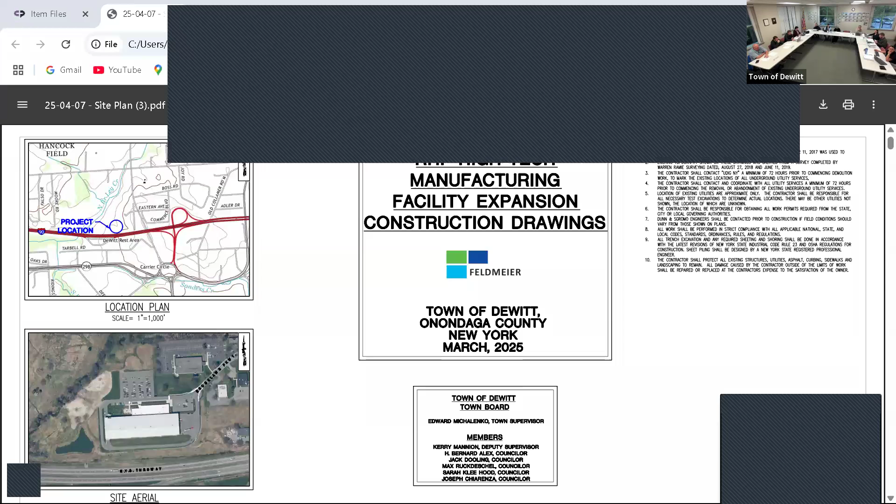First up on our list, amended RHF high tech, for finalizing the whole process on parking. Good evening, Greg Strummer representing Feldmeier. As you may have heard, the ZBA did approve our variance, so now it is back in front of you for questions, comments, and thoughts.

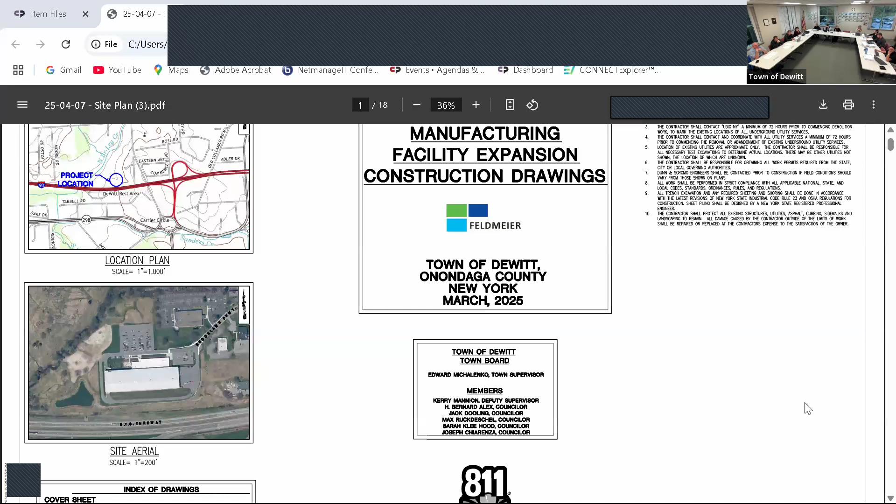And plans. As previously stated, really the only thing that's changed on the site is the reduction in the parking. Otherwise, stormwater is the same, parking and traffic circulation is the same. Nothing has changed on the south side of the building, and nothing has changed here. The only change was we took out the parking that was banked there and the parking that was banked up there. That parking had its own stormwater system, so that kind of just went away with the parking in this plan. And this one here had the capacity over here for this stormwater through here and there.

The RPZ is in now, so that's out of the way finally. What took so long? I have no idea.

Any other questions, we thought this through with ZBA? Other questions? Motion to approve the site plan dated March 25th, 2025 with the following findings and conditions.

A revised site plan was approved for this site on June 13th, 2024. The approval allowed for construction of a 71,250 square foot addition and a 10,699 square foot addition to the site. The construction for those additions are underway. The approval of June 13th, 2024 determined a required total parking count of 420 spaces.

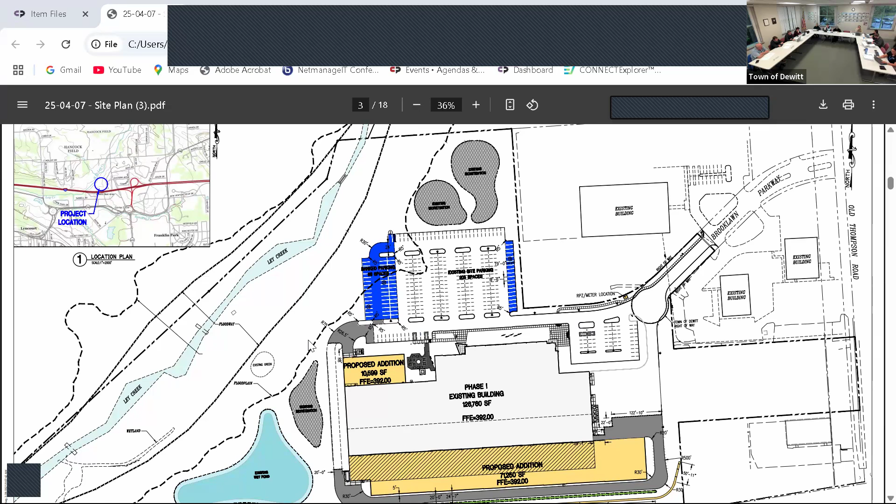The plan showed 111 spaces to be built west of the existing 205 space parking lot as part of the approval. The balance of 104 parking spaces was to be placed in reserve between the existing building and Old Thompson Road. The applicant came before this board for an amended site plan which intended to seek relief from the number of parking spaces required in total on the site and to be placed in reserve.

This board has heard from the applicant relative to their current and proposed use for the site. This board sent a positive recommendation to the zoning board of appeals for a variance to permanently reduce the number of parking spaces required on the site. That resolution and the findings therein are incorporated by reference herein. The zoning board of appeals granted a variance that reduces total required parking spaces to 273 spaces, where the code requires 420.

We want to add the date of that approval? We can, just add the date, so we'll add the date of that approval. The 19th.

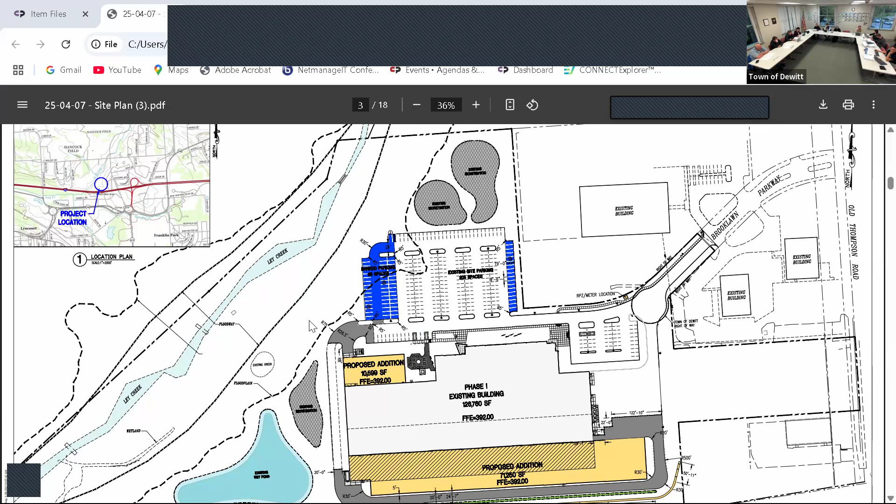Considering the prior findings of this board relative to the justified parking needs of the applicant, this approval hereby further approves that 25% of the required 273 parking spaces be placed in reserve and do not need to be built at this time. This is made with the further finding that said reserve parking is not currently required to be built. The plan shows that the reserve can reasonably be built should it be required in the future. Accordingly, the approval of reserve is made with the condition that the Department of Planning and Zoning or the Planning Board may require the parking be built when the same is deemed necessary or desirable for the current or future use of the site. This approval is made with the further condition that, except as specifically modified herein, Planning Board approval of June 13th, 2024 is in full force and effect.

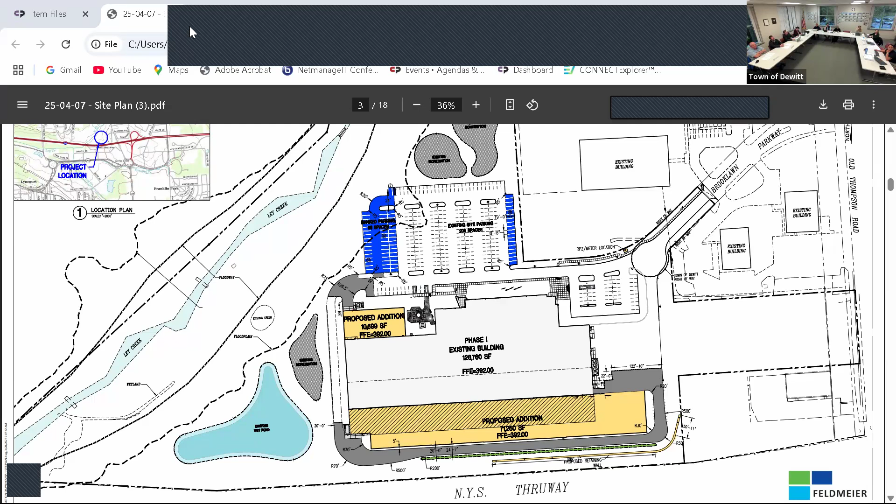When are you going to be done? I think they're thinking end of June, early July, they're going to get their temporary CO at that point. The factory floor was still running at the same time as construction though? Yes, it actually was planned from day one when we did it, so that they could keep operations. The wall in between the two of them had certain cutouts planned so that they could leave that wall, and they wanted to leave it for sound and that sort of thing. Yeah, they were able to continue construction throughout the whole process.

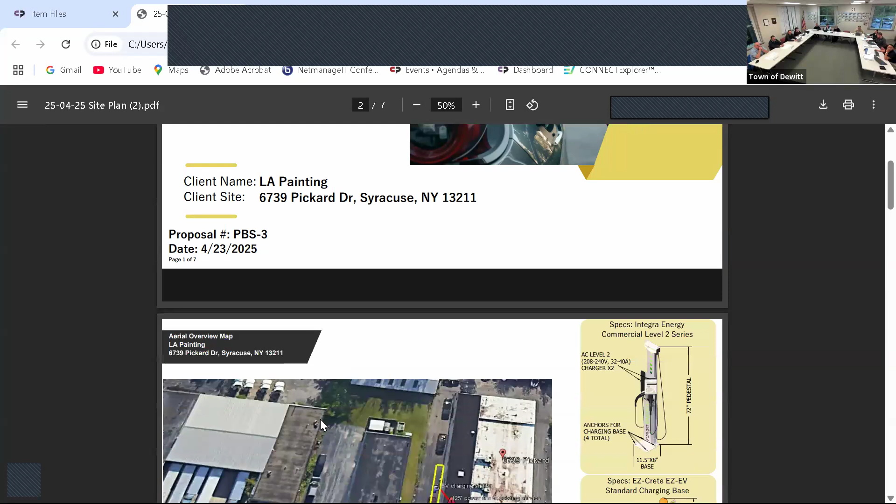Let's see, who's controlling the screen right now? This is your presentation, so just ask her to advance as you see fit. We're going to have 1 dual port in the front of the building on the left-hand side, and then 1 in the middle of 2 parking spots on the side of the building. We're going to tie existing service to an inside panel, a 400 amp 3-phase panel.

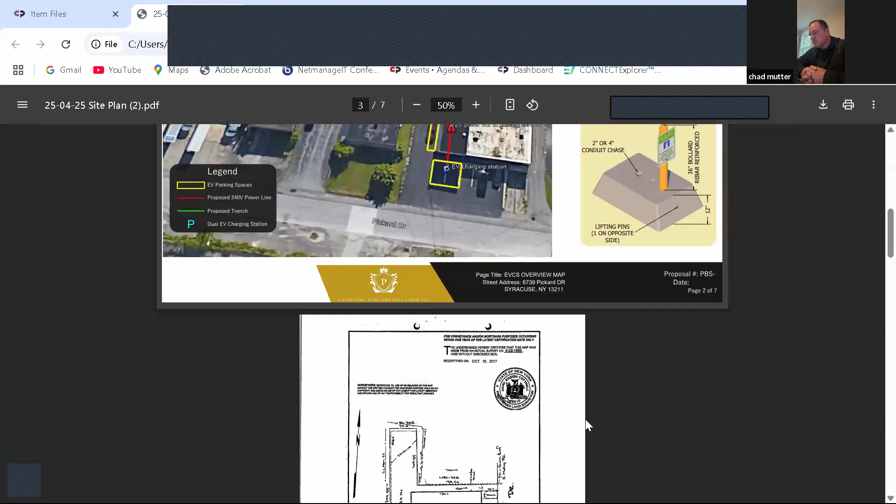You can slide up. These are just the engineering prints that you guys requested. It just shows the front of the building, the charger sitting there next to the 1 car. They'll be able to charge both cars if the empty space is there, so 2 cars charging at once if available. The other charger will be able to charge 2 cars on the side of the building, so it'll be 2 plugs.

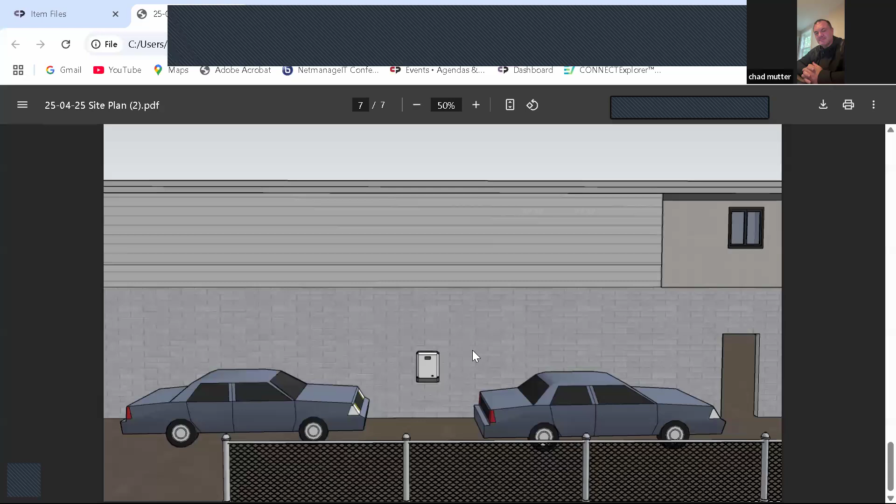Yep. I don't think those cars are electric. Well, you know, they're electric. Okay.

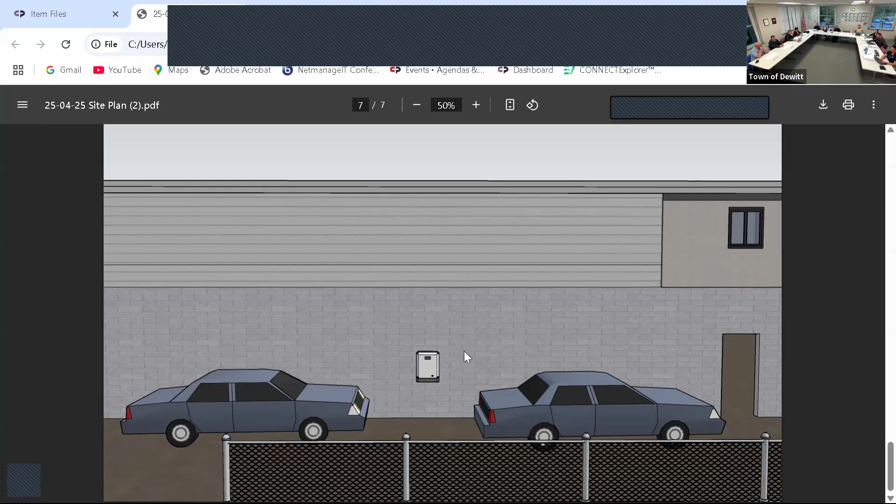Let's open up questions. I think we'll want to talk about site circulation, where some of these are located, protection, etc. Can we go back to the site plan?

The picture doesn't show the 2 bollards that will be sitting in front of the charger as well for protection, for both chargers. Yeah, that was going to be one comment. So the one in front would serve 2 parking stalls that are there.

Effectively, you need 4. The issue we have is that what you're calling parking spaces parallel along the side of the building are not actually parking stalls, so you cannot put something there and encourage people to park there. Parallel parking is not allowed within the town.

So we've got to look at other options for location - right now is it a one-way loop, where you drive around the left side? No, you can get 2 cars down, so it's two-way there. If you don't like how I have it situated in the drawing, I can also put them in the back of the lot - there's about 15 parking spots back there.

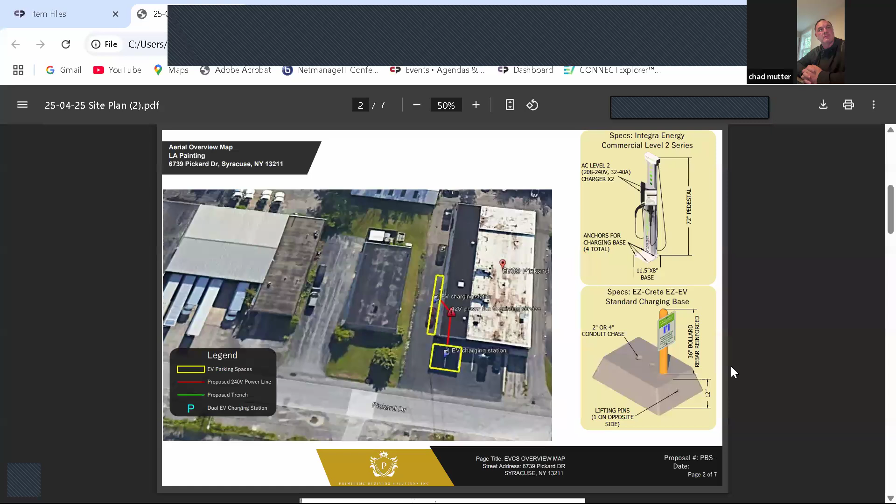But he can't - so you're telling me he can't park his commercial vans there to charge? Technically, no. Okay, I'll have to let him know that, because that's where he wanted to park his vans. Yeah, parallel parking is not allowed - it would not count towards parking counts or be approved on a site plan.

Okay, I can move those 2 spots to the back of the building then. That's an easy fix for me - I'll just redraw the map to show the 2 additional spots out back.

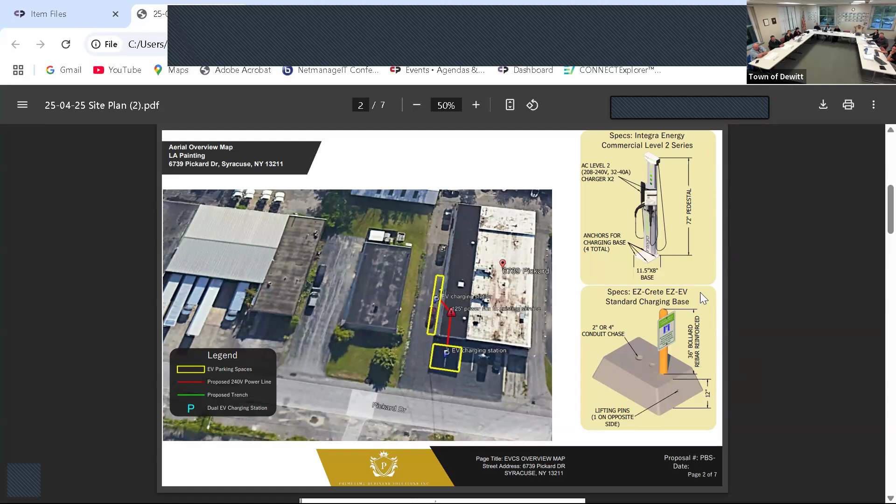And then the charger in front is actually set behind a concrete walk, right? Yep, it's a precast concrete pad we build in-house with a bollard inside the concrete with rebar, and it's held to the front so somebody can walk behind. The concern is cords laying on the ground and someone tripping - that's held forward so you can walk behind it, correct? Yep, there are retractable cords on the charging station, so they retract back into the machine after use instead of being coiled.

So the way this is represented, is there a walkway like a raised curb, or is that flush? The aerial photographs just make it look like it's paved all the way to the building. Which one is correct?

That whole gray line, it's paved all the way around. So what is that gray line represent?

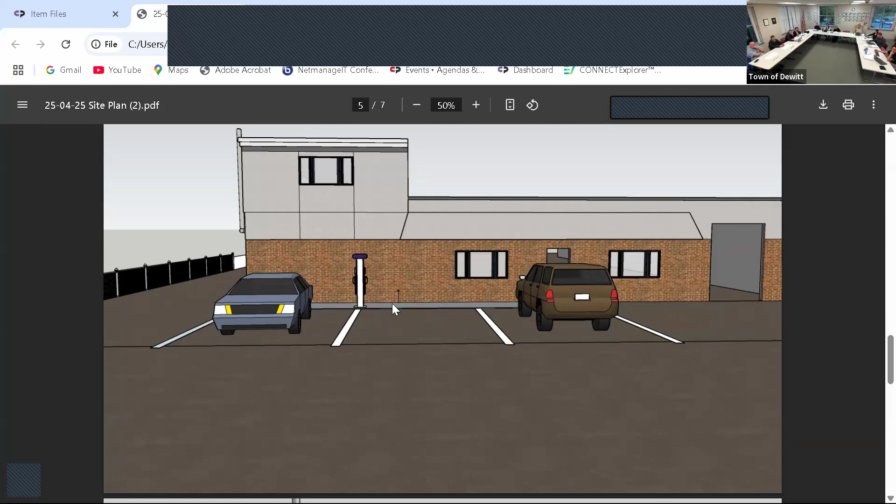That's just the base of the building. It's nothing. I'm going to be putting a concrete pad in the middle of that parking spot, right on the center line, dead center. There's going to still be a walkway behind that charging station.

Does that minimize the size of the parking space? No, I'm just going to put it dead center on the center line of that parking spot. It's not going to minimize that parking space, nor is it going to be in the way of the walkway? There is a little walkway there.

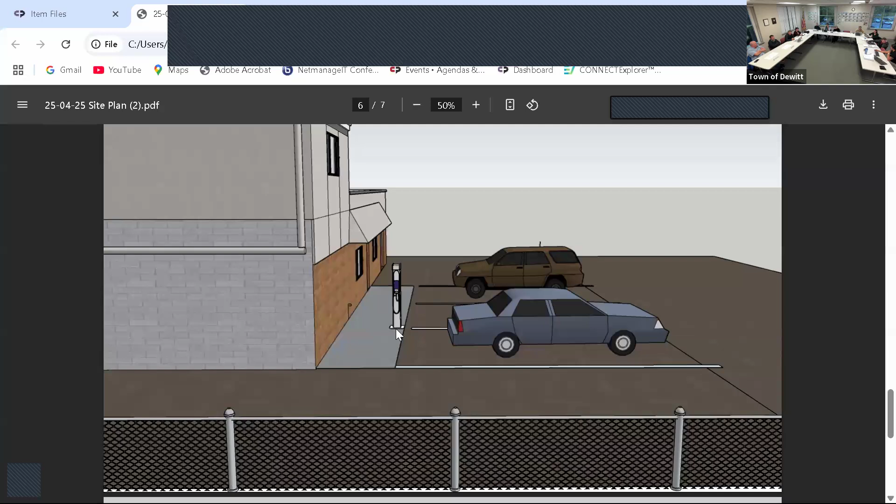As it currently exists, there is a parking stall plus what we'll call the concrete sidewalk, that gray you're seeing there right now. You're not impacting the parking stall dimensions as they exist right now? No, I'm not.

I think we actually need to see a drawing with the pad drawn on it and the correct sidewalk, because looking at the images online, it doesn't appear to have a sidewalk like you're showing there. If that is there, we just need the correct dimensions of everything in your pad.

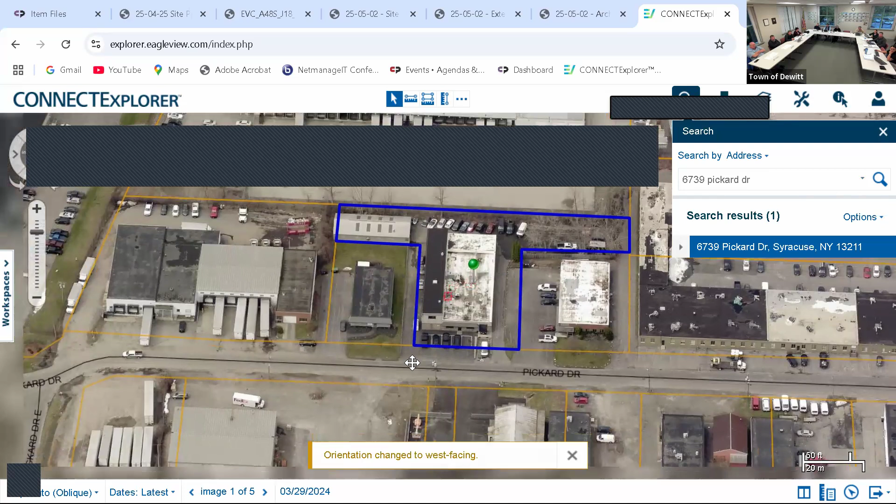If I heard him correctly, he's putting it on the center line of the parking spot, which takes up a strip and minimizes the width of the parking spot. There is a strip behind the parking spaces, I think, so he's putting it on the center line but behind the white line, so it doesn't impact the parking dimensions.

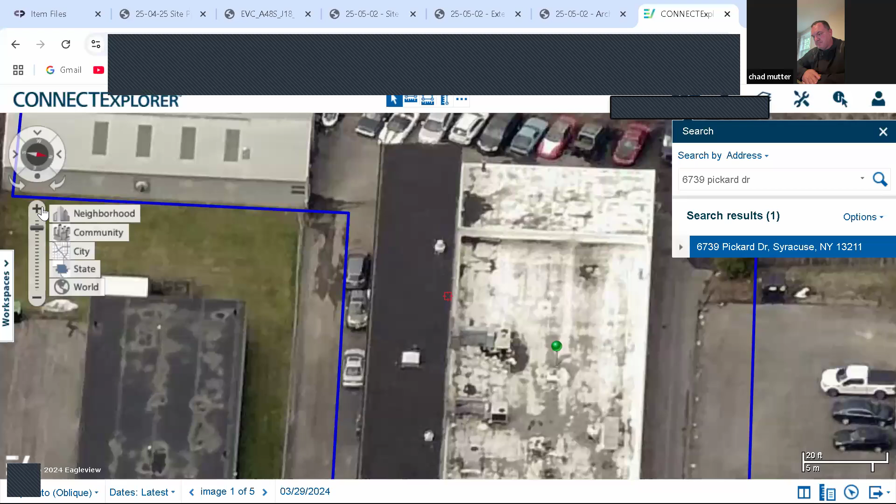Correct. So what I then heard - it will be on the walkway, so you have to walk up over this pad? No, walk behind. I think it's misrepresented in the drawing. It looks like a concrete pad, but it is paved directly up to the building.

They will be installing a small flush concrete pad to put the charger on in this location, with 2 bollards to protect it. And it will be flush with the pavement - it won't be sticking out. There will be no lip on the concrete pad. It will sit flush down in the hole with the pavement.

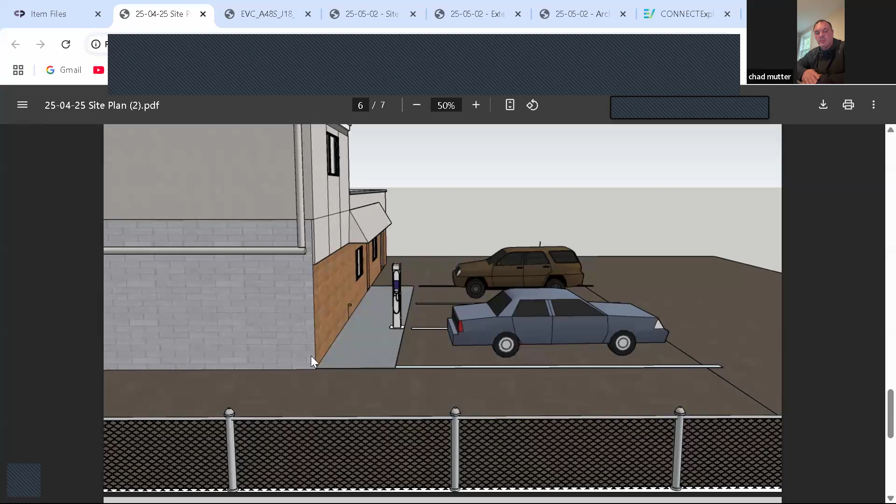From above - so right there, the one you just passed, can you show that? Can we get it drawn on this, or is that like that blow up right there? I don't think it's... I think that's just a survey. No, it is shown.

As it's shown there, it's not where you would actually put it - it would slide up to be in line with that parking stripe. Correct, yep. Okay, so then that could change.

Just show us if it doesn't have a height to it, so you're saying it's flush? It will be flush. So if you show that in your document, and also show the width of it, just so we can see in case it's not flush. Okay, there should be the dimensions of the pad, I believe.

If you go up a little bit, it might show what the pad looks like and the dimensions of it. The pad doesn't look flush in that image. That's the way it looks going into the hole. I know, but that's why your drawing should show us how it will end up.

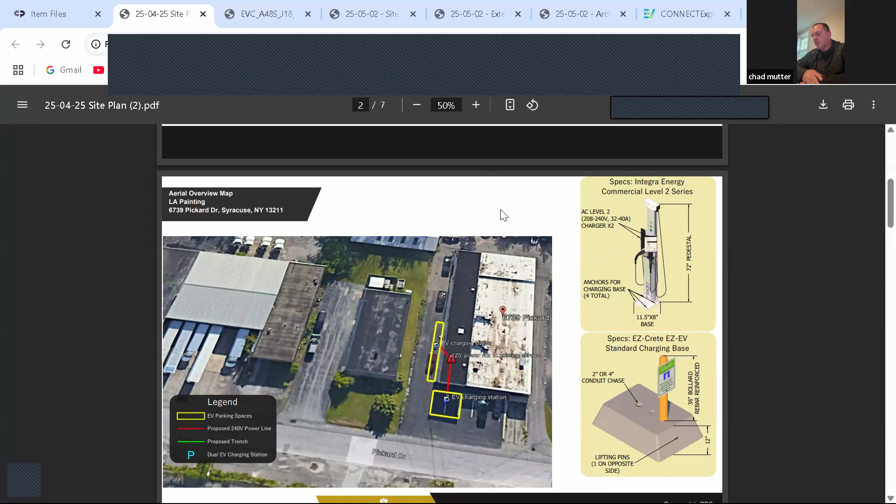I can send you a lot of pictures of our previous work of what it looks like flush with pavement and whatnot. We just wanted to show you what the pad looks like with the bollard, the sign, and what the dimensions are of our concrete pad that we install at these properties. And then, if you go back down to your site plan, I think adding a note there.

Pedestal mount will be flush with adjacent parking, asphalt paving surface. And so the depth of the sidewalk.

If you're saying it's there, where are you placing the bollards? He has 2 bollards on each side of it. I think, to Jenny's point, you need to blow that up a little bit and dimension it, showing where it is from the face of the building to the backside of the pedestal. Show where the bollards are - I'm assuming they're in line with the parking line that runs north-south, at the end of the stall. So there are definitely 2 bollards, because your picture only shows 1 bollard.

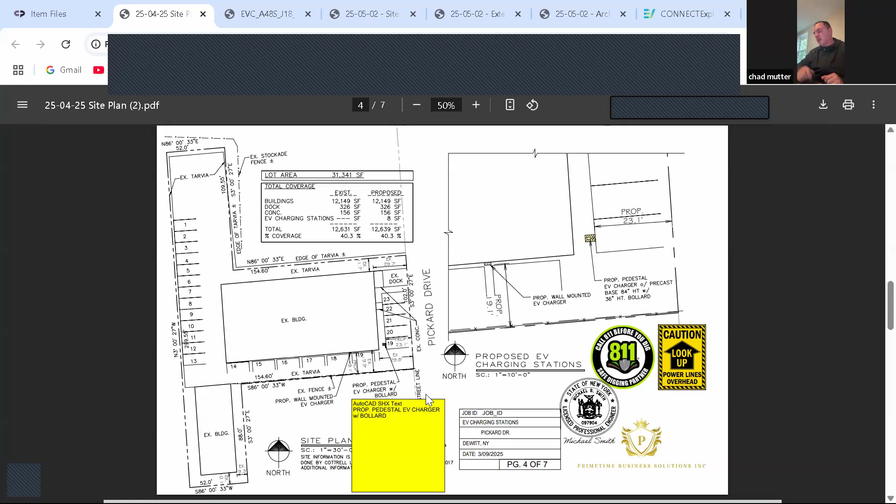I put 1 bollard in that concrete pad, that's how I put it. There's gonna be 2 bollards total with our concrete pad. So the drawings are just very inconsistent from what you're saying - please correct the drawings and get them to us so they match what you're saying.

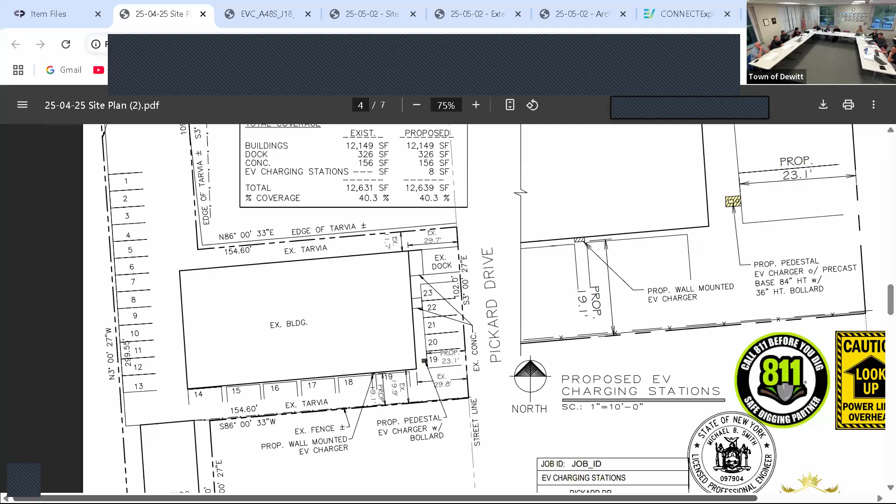Can you talk about if you move it to the back of the building, the way the parking is situated there, not up against the building - where would you put the charger? Yeah, thank you so much.

We're gonna dedicate 2 parking spots back there, where there's a line of cars sitting, and there's a panel on the back side of that building that will be running through.

So the charger would be a pedestal over by the parking spaces, or would it be on the wall of the building?

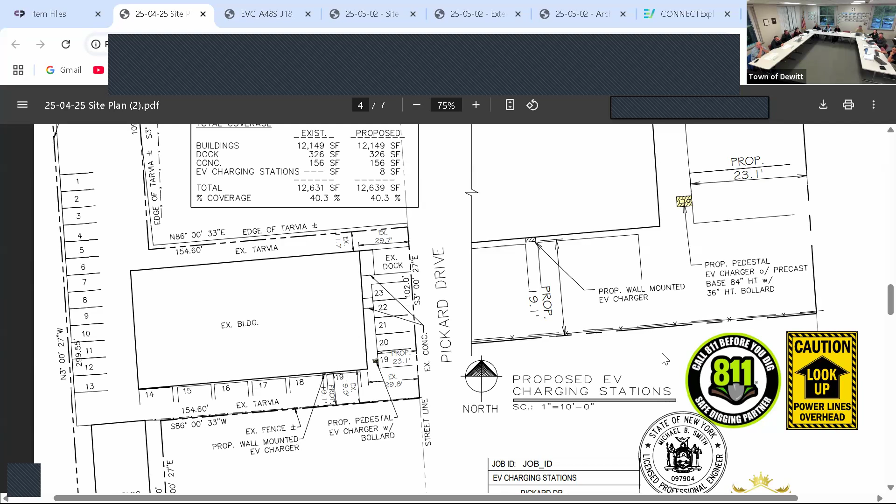Can you pull up the photo? It sounded like he was gonna put it between parking stalls 1 and 2, through 12 - that's what I was understanding. Yeah, the stalls along the back property line.

Just want to make sure the parking space is not impacted at all, and that you still have the full 9.5 by 19 feet. It looks like you're lacking some length there. I would also recommend that parking in the back is striped.

A little Wild West back there right now. Yeah, I can get pictures out there tomorrow and take a look at what parking stripes they have back there, if any.

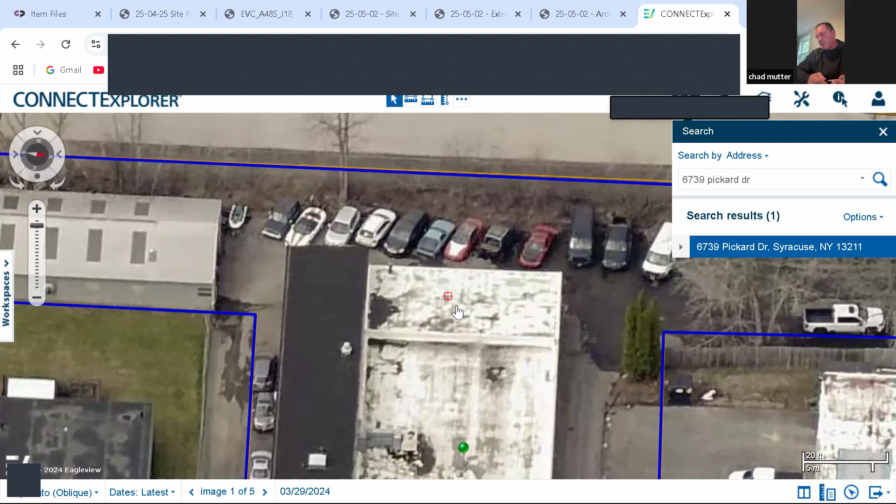Once we get our work done, we can restripe these parking spots - seal and stripe, back up onto the road, like how the parking is. Yeah, but that's just a normal condition in that area. I thought we concluded these lines are all skewed - probably, yeah, the whole thing shifts over this way and down.

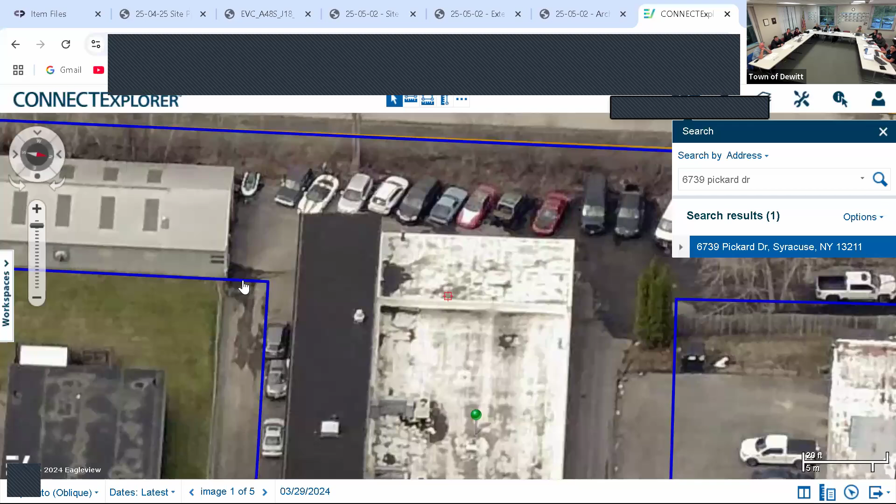The charging stations are on the front of the building, so you're also gonna trench the pavement to run the feed. It's gonna be a straight shot into the building there, but all underground at that point. Underground, yes sir.

So is it a completely different feed in the back? Yeah, the panel they're gonna - he said there's a panel in the back.

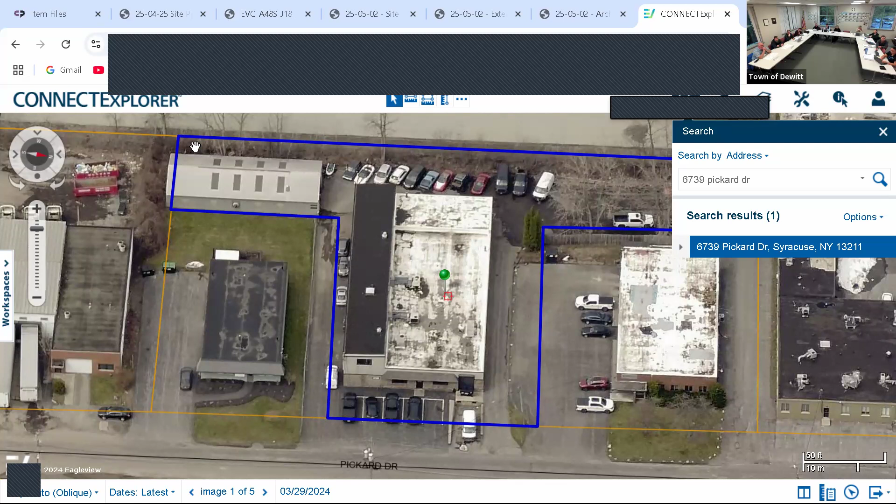But looking at that picture, I don't know how that back parking lot works - there's no roadway. Those cars get in at a little bit of an angle. You're not seeing the road right up against the building - if you look at the site plan. Oh, okay, there you go.

Still a little tight, but I guess we could put them in.

If he's gonna put the charger on the property line, are there any ordinances about how close something can be - an offset? I don't think there are setbacks for chargers and stuff. I don't believe there are. There'd be the landscape buffer, but in an existing site like this, it's pre-existing, so.

Will you just double check the parking counts based on use and what's there? There are a number shown that are not compliant. But what if it's efficient by removing the parallel parking? We can make a finding that it's pre-existing non-conforming, but let's set the baseline so we know what it is.

What is the use of this building? It's a warehouse, and it's also an office for a painting company. How many employees do you have working in the warehouse?

I'm the contractor, I don't own the building - I'm the one installing the charging stations. I think he's got roughly 15, 20 employees.

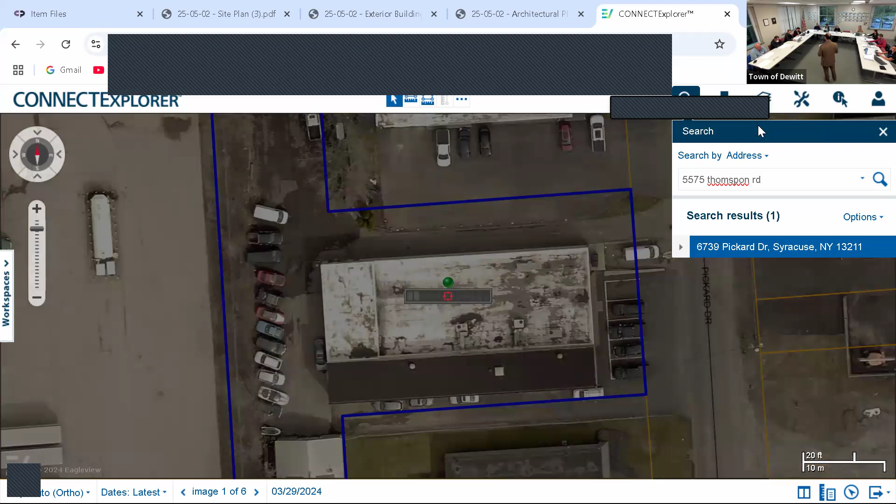So the building itself is 4,696 square feet on a 0.87 acre parcel. The drawings I provided show, on the top, a survey of the existing conditions. The second page is the proposed concept site plan, with one side zoomed in a little closer so you can read it, and the other side pulled back a bit.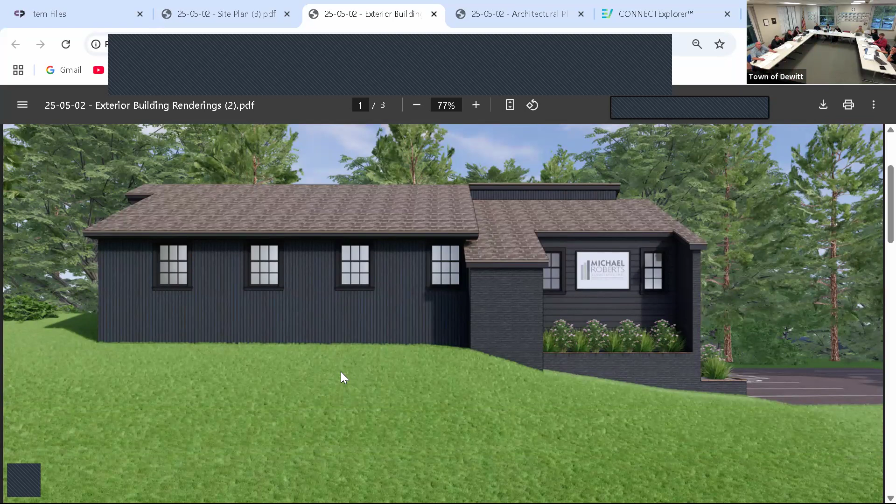On the screen here you see elevations of the renovations Michael Roberts proposes, which will freshen the appearance of the building. They won't be drastic architectural changes, but there'll be new siding, new landscaping in terms of planter boxes. Looking at the previous elevation of the north side of the building, the architect is reorienting the entryway slightly, getting rid of some tired stairs that need to go, and freshening and reconfiguring the parking lot slightly. So that is the general plan.

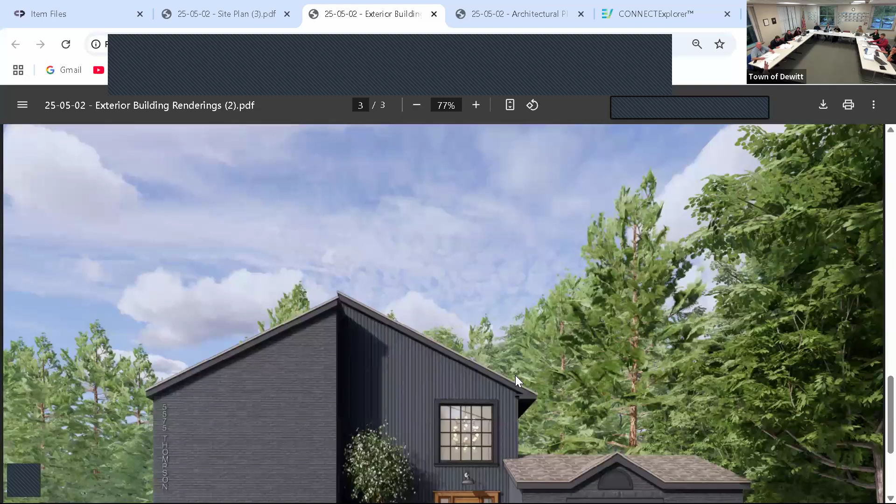I also included floor plans of the building, though I know it's not as big a concern for this board, so you can see how many people will actually work there. There's 4 offices for partners, 3 offices for staff and receptionists, so there'll be no more than 8 employees at any given time. Their current offices are in the town of DeWitt with a staffing of 7, so there's an extra office to grow by 1. The rest will be conference rooms, storage, and normal utility space.

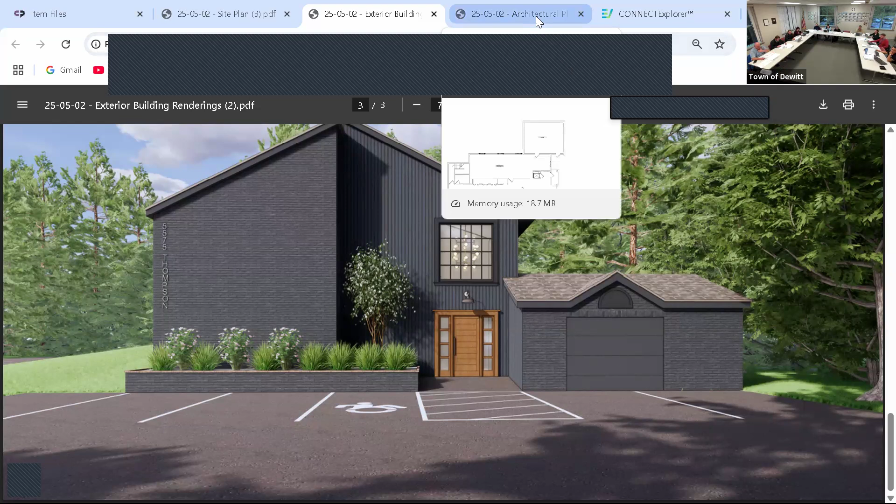The plan is that this is a very well screened property in terms of existing vegetation, and the plan is to preserve that and freshen the landscaping towards the road. Rudy Zona prepared the concept site plan, which contemplates preserving the existing vegetative screening because there is residential single family use on the rear property line. So I'll stop there for questions.

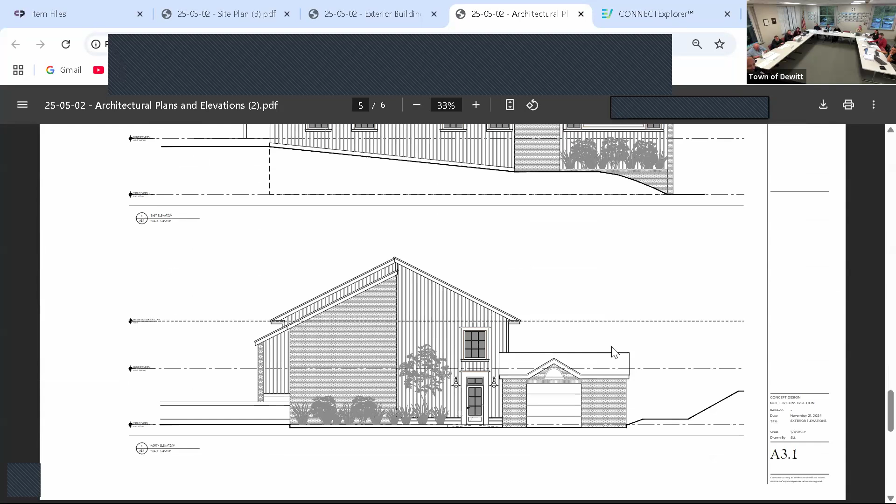What is the intended use of the garage, just storage? My understanding is they could put a car there, I think, but I'll have to confirm that. There's a parking stall right in front of it, so I'll confirm, but I believe it's a functional garage as it sits now that you could put a car in.

But were there any conditions from the special use permit? Yes, there were some conditions. The conditions included no installation of a standalone monument sign. The only signage on the building, depicted in the elevations, would be a sign on the side of the building. Because of its relative proximity to residential uses, the applicant consented that the sign would not be backlit, that the only lighting would be from a spot in the planter. This is not a business that depends on drive-by traffic; they don't have customers coming in, they're financial advisors. Every now and then someone might come to sign a document, but it's really an office for 7 employees.

It could be one of the focused lights, like for artwork. I'd even be okay if it was a wall mount, done well. But they didn't actually make that a condition. The condition is one attached building sign up to 50 square feet with reasonable lighting for the purpose of building identification and safety, subject to planning board approval. So there's wiggle room in there.

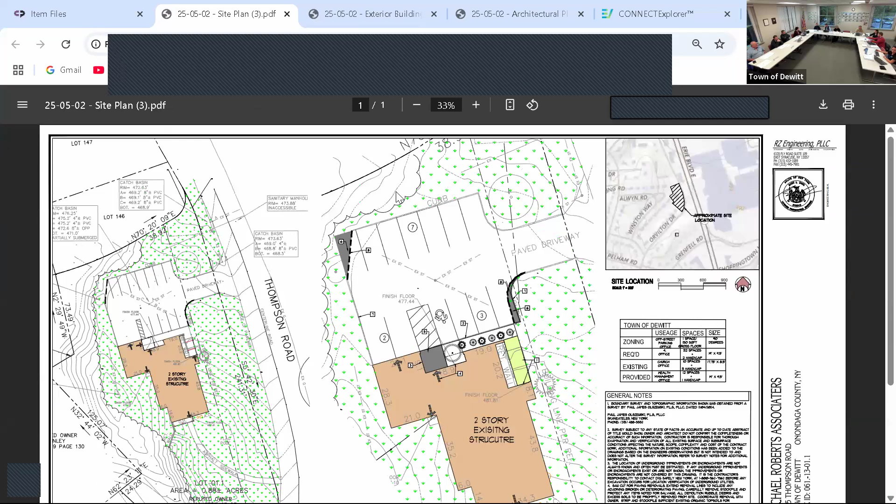The elevations should be annotated with materials and changes as well. So they should note on there, like, existing brick to be painted, if any of the windows are being moved. There is a demo plan in the floor plan, you can see exactly what's been demoed.

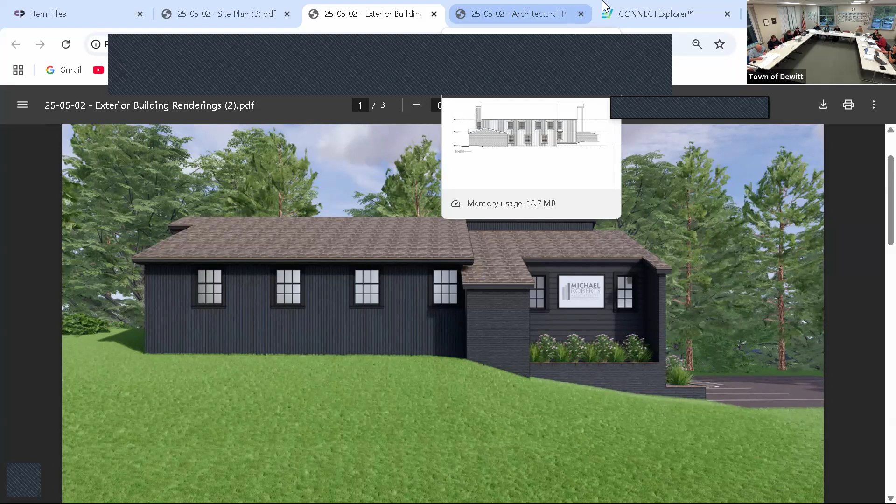That's what prompted my question, when you look at first floor A0.2, the demo shows a bunch of the windows demoed along that wall. Then when you look at A1.2, some windows are moved, so there's a lot of infill that's gonna happen on those walls, which is gonna change all the material there. I mean, having a building that's built in 1984, I would think you're not just gonna patch the hole in the siding.

We wanna kind of know what's happening with that, see what materials will be used, whether it's being changed. All the colors and everything should be called out, materials called out, along with the full planting plan.

Is any exterior lighting proposed in the parking lot or on the building? Yeah, I think there would be at least for the sign. So we can include a lighting plan. Also, the curbing that goes along the driveway needs to be extended to be 3 feet from the edge of shoulder, and it needs to be granite. Our engineer will be providing comments on specifics once that's extended. Understood.

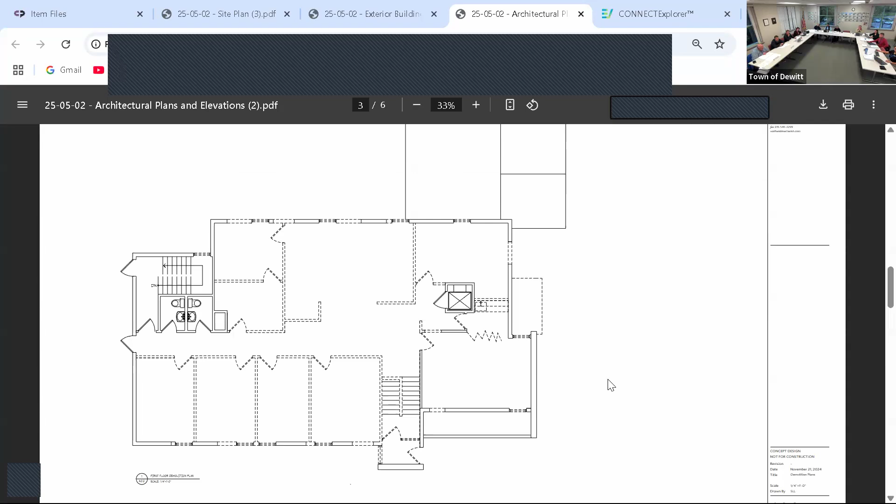You wanna talk about that ramp? What is the plan for the ramp right in front of the building? You're pulling out some of the floor, adding a grand staircase down to the elevator, so that's the accessible entrance, the new one right there. Keep going, keep going - that's the basement floor. No, we wanna go to the first floor, don't we? Oh yeah, sorry, you're right.

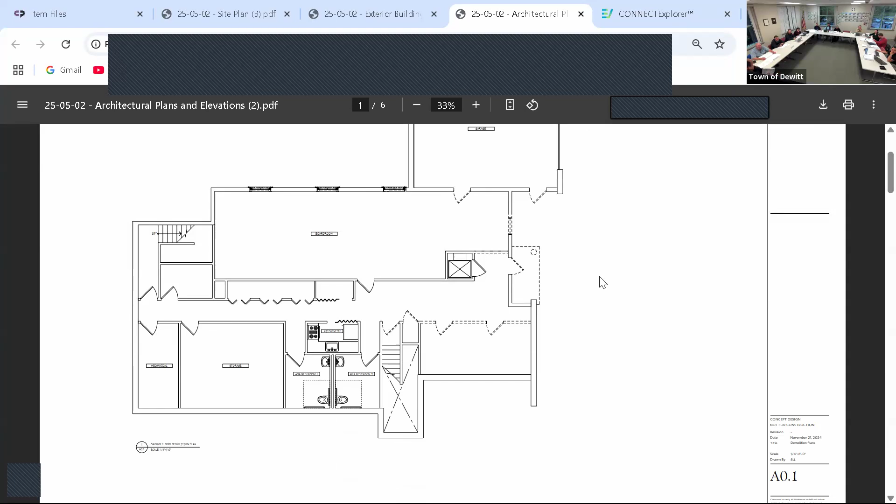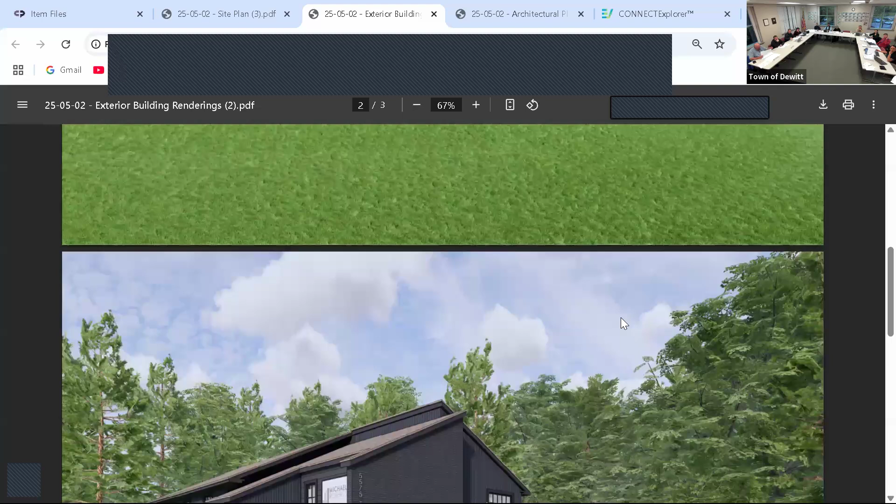So the other side, look at the garage. There you go, that door and the ramp that's there. Part of the plan they're determining is to remove the ramp, which I think runs where the planter is right now.

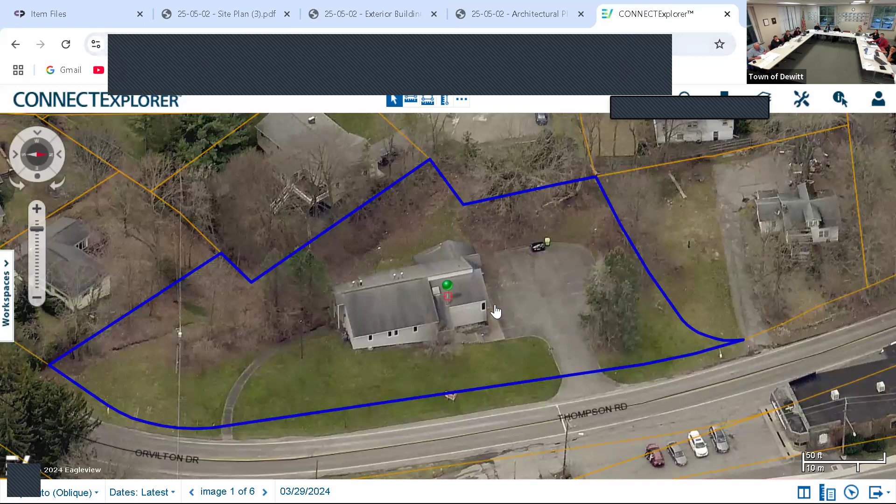And to straighten it out right in front of the door. Now, you don't likely have enough. So we're talking about this spot right here. No, to the right more, it's like right in there. Yeah, right next to the garage. There's not likely enough room by code, because you're gonna need a landing outside that door plus the ramp to get down, so that needs to be thought out.

Okay, I can bring that to... yeah, essentially the code reference is in there. So you're saying there's not enough space to do it this way? Right, because you're gonna need, I think, at minimum 5 feet off the face of the door.

Flat pad landing, 2% max, and then you can have your ramp after that, and the ramp's gotta be ADA compliant. And I don't think you have enough room right there to do that without coming into the parking lot, and then you would have to push your parking spaces away, because you can't have it go into the parking spaces.

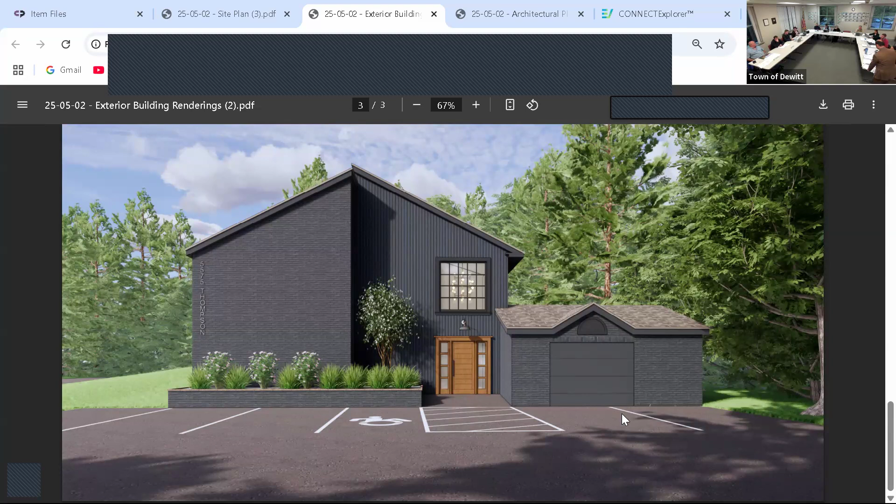Yeah, and that's what we need. And that goes to my next point: PJO provided the survey in here, but they didn't shoot any spots on the corner of the parking lot or anything around the building. We got a couple of finished floor elevations and stuff that are in there, but they may wanna just update and add some spot elevations around the building.

Add the topo to the site plan. Well, the topo's there. If they want some, they should add some spot elevations, certainly around the parking area, but at the building where the building meets grade. That would help determine how much difference you have between the 477.44. Just theoretically, I think the ground floor finished floor elevation with the parking lot, we can't determine because there's no spot elevations. Understood.

And the next set of plans that you get us with all the updates, can you make sure the architecturals are all signed and sealed?

That'll be the first place I go when I leave here tonight, I'm gonna go stand on that and see if it really is pitched. I don't wanna say something that's not right. I don't think you'll be able to tell, because currently it's a window, not a door, so you don't know where the finished floor is by looking at it from the outside. So you don't have to waste your time going tonight. Well, I've been there once, I just don't remember there being much of a hill there, but I understand.

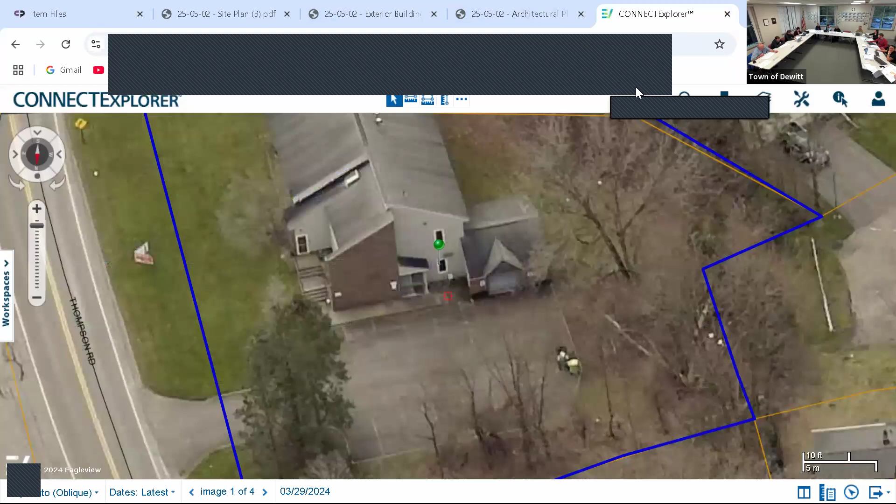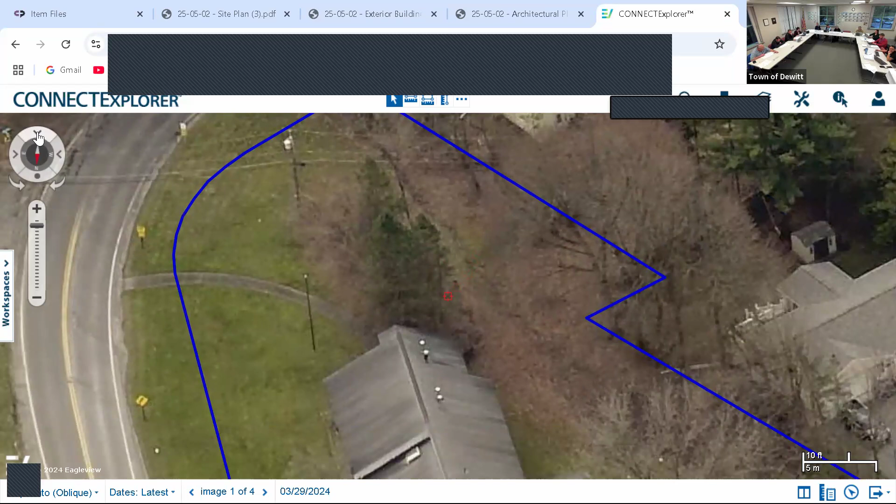There's also around that backside some condensing units, and there's a flagpole. What's the plan with that? There isn't plans to change, you can see them on the concept plan, they're depicted. I don't think there's any plans to change HVAC, I think it's adequate. Well, we can screen it, right, since it's on the front yard of the building? I can take that to my client. I don't know that that's the side facing the street, but it could be reasonable. Your corner lot, landscape, you technically have two corners.

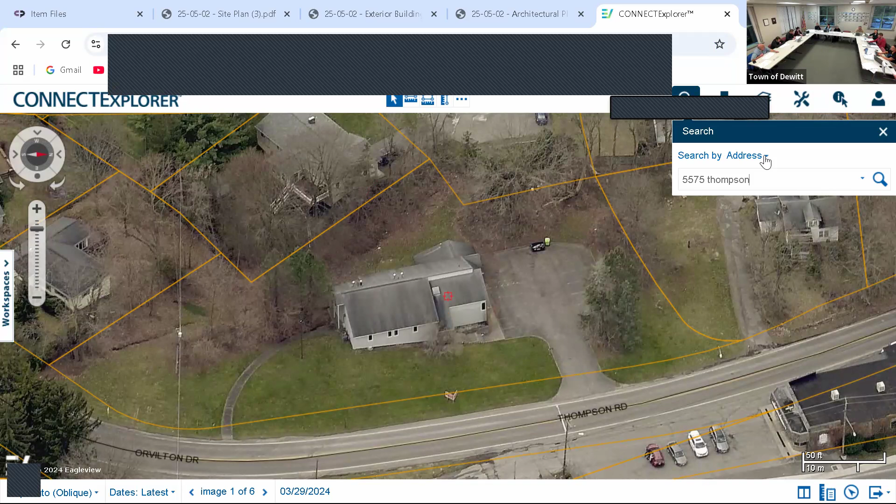I think we're a little sensitive to the flagpoles. But also existing, right? So you're talking about HVACs here, that's what we're talking about. You know these stairs will go, right? You're talking about this is the emergency egress. Right, that still leads to a stairwell that's in there at least. And so these are the existing HVAC units. Yeah, so those should be screened. Screen them, okay.

So for that emergency egress, and when you say screen, you mean vegetative? Yeah, they could be landscaped. That pathway has to be lit, I believe, for 30 feet. The emergency egress has to be lit, okay, which gets into some of the neighborhood issues. Yeah, you can just do a little bollard, like bollards or something like that. But to the extent that it's not conforming, it is existing, so if it's seen as undesirable to light it from a neighbor point of view, I think an argument could be made that we don't have to.

We have a change of use, so you have to bring everything up to code. It's an office use, but I understand what you're saying. It was previously office and it's still office. I'm just saying, if you deem it undesirable to light it, I think there are a lot of good low impact options, and there's a rational argument that would allow you not to, if you deem that desirable.

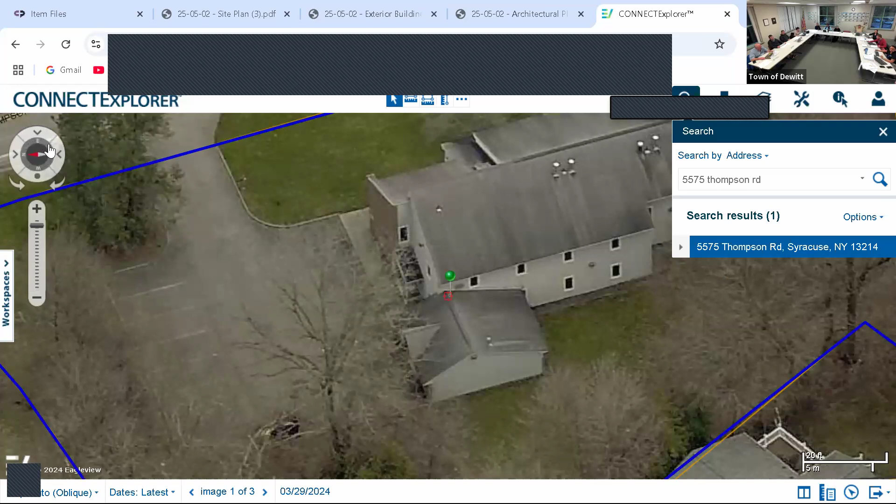You know what I mean, you can only see that in one direction. So if you're saying you want it like the fire stations, put it around the other side. There may be room to bring it over to this side if that makes more sense. I think so, over here instead of here.

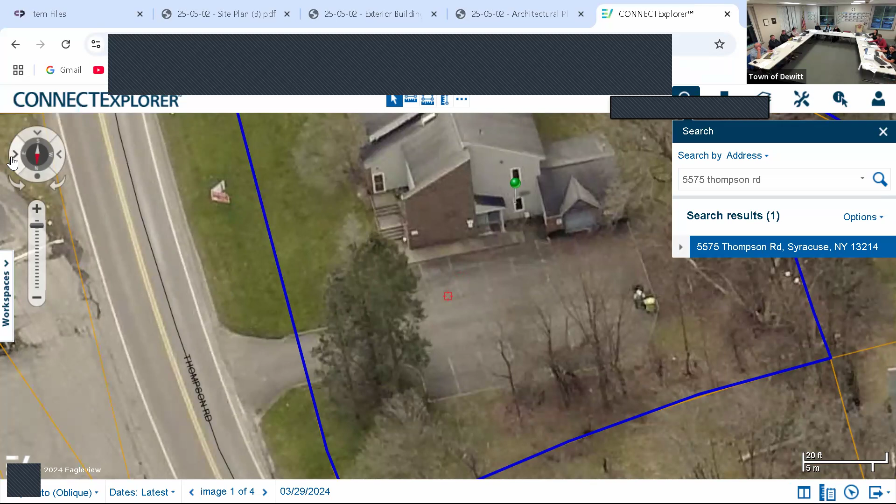The front door side, that makes sense too. Then it doesn't look good with the other sign, I think, but if you're just reducing it to a number, it may not be so bad. Right, I would just say you want the fire truck to know where to go. Fair.